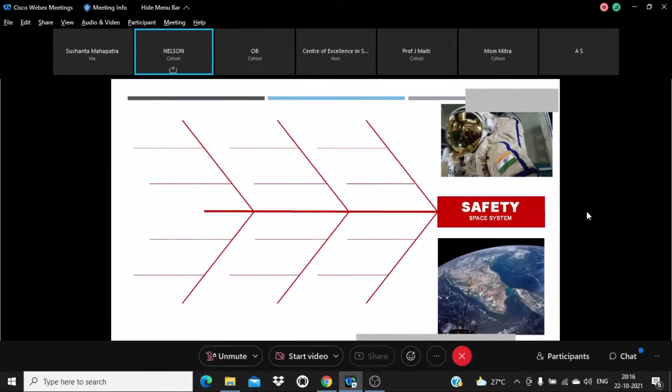So when we consider the safety of a space system, in space-faring nations or space-faring organizations, mainly six factors have been taken into consideration.

First one is human safety. Human safety consists of the ground crew safety and astronaut safety. And next comes public safety, the local public safety and general public safety. Local public means the facilities and public located near our facilities.

General public means wherever the launch actually occurs. When we consider space, when we consider industry, hazards are static. It either gets transferred from one point to other through pipelines, conveyor belts, or process equipment.

But here, the launch vehicle is fully loaded with a lot of propellants and propulsion systems. It is passing through many countries. So the safety of all those persons has to be accounted for when we design any launch vehicle and design the missions also.

Next comes asset safety - the facility, whatever has been built, has to be protected. It has to be protected from external fires and fire scenarios which can happen because of processing.

Then comes mission safety. When a launch is taking place, there are a few inbuilt systems which have been incorporated into that launch. We look for a lot of components assembled together, which will be integrated into that vehicle. These components can function, but they can have malfunctions also.

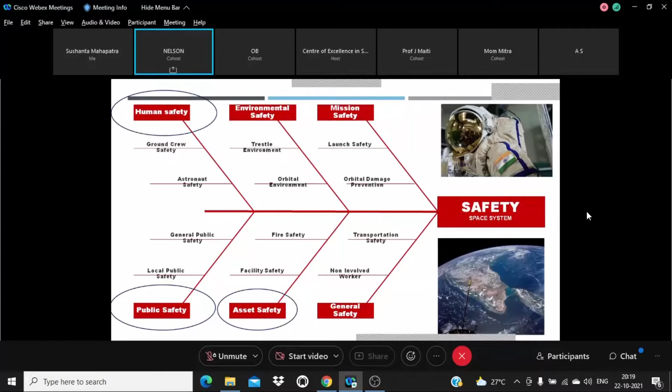So our systems are complex and very hazardous too. When we compare some products, what industry makes - if industry makes steel as a final output product, this product as such is safe.

Only the material handling part comes into it. But when you compare a chemical which has been manufactured, this has to be properly handled. The chemical has got inherent potential dangers. So it poses hazards either during manufacturing, after manufacture at the time of storage, and even at the time of transportation also.

So prevention through design should start with the business concept. The business concept should be very clear. The persons who do that business should be very clear about the material they handle and the activity they do.

In the early stages of my career, I was in construction, then equipment operation and maintenance. So when we get inducted into an industry, normally it's already an established industry, the systems are in place - we just have to manage the systems.

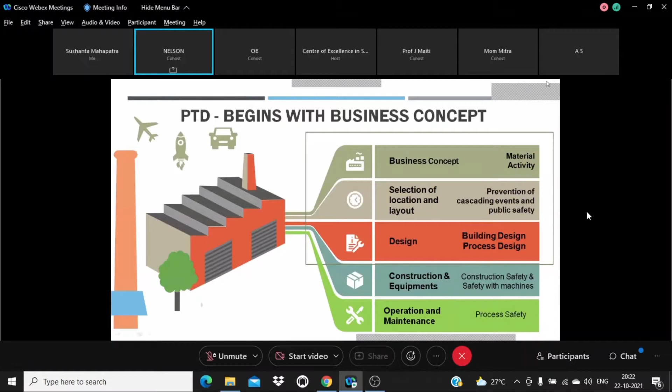So we should have a strategy for managing the unknown. If it is an established process or some data is available within industries or other places, it's easy to get similar best practices happening in other industries, and we can adopt it. But when we go for a totally new type of activity, like R&D activities, many of the activities will be done for the first time.

The best example I can quote here is a fuel oxidizer mixture used for propulsion - how it behaves at different types of stimuli is unknown. There are different types of stimuli: when you heat it, how it behaves; when you give an impact, how it behaves; when you give a shock, how it behaves; when you give an electrostatic charge, how it behaves. All these details are unknown.

Why? Because there may be some literature data, there may be some modifications, there may be some value additions - only then a new compound will be made. So if it is available still, there will be some deviations between the literature and the actual data. All these data are unknown at the initial stage.

So we should have a strategy plan. We should always have a highest safety threshold, applied risk reserve, to accommodate all those unknowns. So once the item is formed, we can evaluate all these parameters - how safe it is to process or how safe it is to handle.

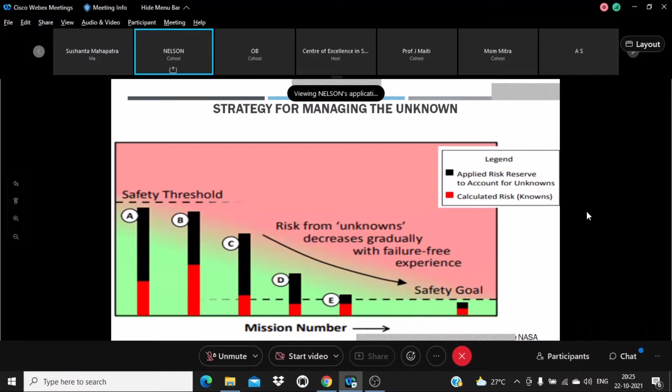So I will explain this with a case study. Last year, 2020, this incident happened at Beirut, Lebanon. The compound involved was ammonium nitrate. The first thing many of us would have thought is that it is an oxidizer - how could this have given such a devastating effect? Why? Because for the first time in my life I saw a blast wave captured on video cameras, even videos where persons traveling in a boat in that area - you can clearly see the blast wave coming and hitting the boat.

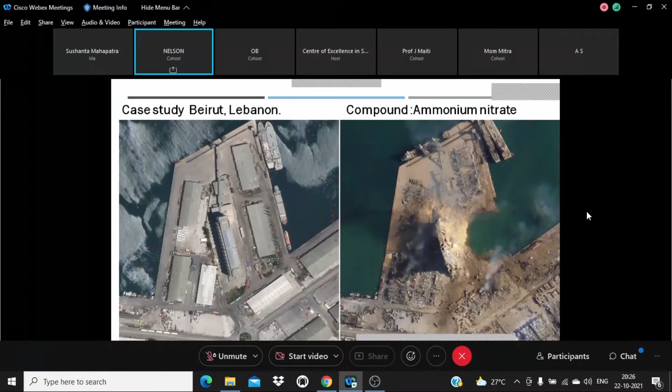From this picture, you can see the place where it was stored is totally devastated, gone from that area. Nearby, all buildings have been damaged, and the damage has caused very great loss for that particular area as well as the country. This is a closer view of it - we can see how the oxidizer, which was considered an oxidizer and fertilizer, caused such big damage to that area.

So first we have to understand what this compound is. We should definitely clearly understand what material we are processing. So ammonium nitrate, when considered for UN classification - there is a unique UN number allotted for all kinds of compounds which have been listed. So when you consider ammonium nitrate, there is a UN number, and it is classified as 1.1D. The 1.1 is nothing but, when you take the UN classification, it is classified as explosives - 1.1 is massive mass explosion hazard.

So utmost care has to be taken when we handle 1.1. This other compound, 1942, ammonium nitrate, is considered as an oxidizer. This 5.1 is nothing but oxidizing substances. 2067, that is also an oxidizer, categorized 5.1. You can see it's an ammonium nitrate based fertilizer.

But if some additives are there, like combustible materials, it can even give a devastating effect - the total property of it changes. And even in case of a fire, ammonium nitrate actually does not burn. However, it will support and increase the rate of combustion in the presence of flammable or combustible materials, even in the absence of oxygen.

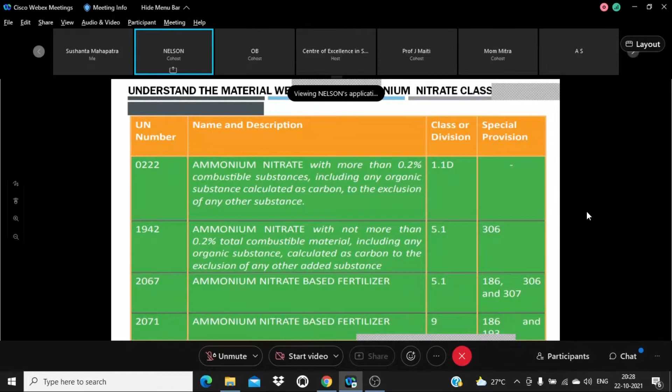That's why this is used as an oxidizer along with fuel components in many propulsion systems. Unless the total severity potential of this compound is known, this kind of incident can happen. Why? Because normally an oxidizer does not require any separation distance for storage. So it was stored in that area. And once a fire happened, all this came together and resulted in an explosion.

So I will take one more example, the LPG terminal incident which happened at Mexico City. Here also, we can see in that picture how beautifully it has been packed. The architect has played a very good role in packing the materials in a very small compact area.

But once one explosion happened, it resulted in a domino effect. The projectile flew to a distance of 300 meters, and there were a few modifications which were done.

Regarding the hazard identification, you can see no formal hazard identification process was carried out. There was lack of awareness of potential death toll if a release occurred. Why? Because you can see the nearby facilities and the populated area are very near to these facilities.

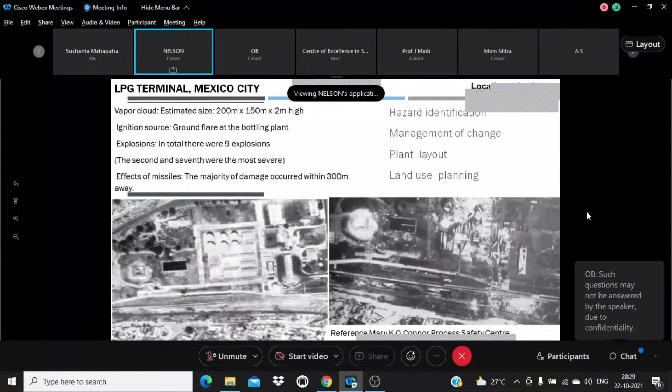This is actually a reference taken from Mary K. O'Connor Process Safety Center. There is a data analysis for 30 years with a number of incidents, and the outcome is that majority relates to mechanical integrity and land use planning. If land use planning is done properly, the consequence of many of these incidents could have been reduced - you could have reduced the fatalities to a very drastic number.

So when we consider prevention through design, it's not only the small devices we consider, it's not only the machines we consider - we should consider a holistic approach for our total business itself.

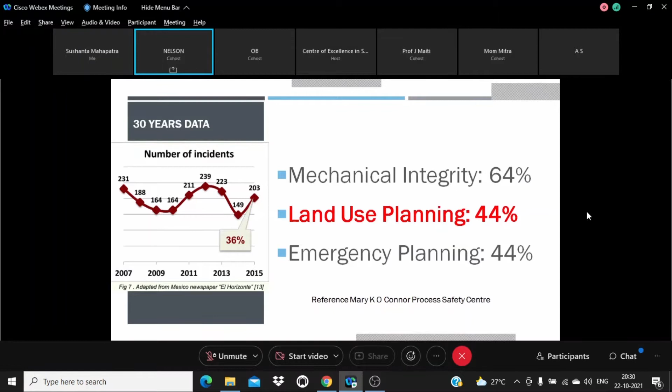Next, one more incident - this will help in getting more understanding about the importance of location. It's the Pepcon incident which happened in the US. Here the compound was ammonium perchlorate, used as an oxidizer in rocket fuels.

Here also a fire happened, and it gave a blast, but out of 77 employees, 75 escaped, running or driving away from the facility through the desert.

And the nearby facilities were not fully affected because there was a sufficient separation distance between the other nearby facilities. And the remaining employees were differently able - one was not able to escape, and one stayed back to alert emergency dispatchers of the situation.

And even the firefighters were approaching that area. The company had given the employees warning that there could be a devastating explosion. This is a major incident - when we consider the industry, all employees will be properly trained in case of an emergency scenario. So handling an emergency scenario inside a plant will be much easier compared to when we go for an offsite emergency.

So according to our business, we should select a proper location to get this advantage. And here also you can see ammonium perchlorate - 0402 ammonium perchlorate is classified as UN HD 1.1, and 1442 ammonium perchlorate is classified as UN HD 5.1.

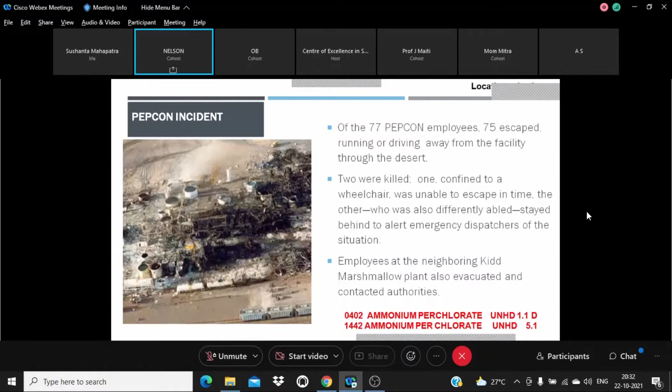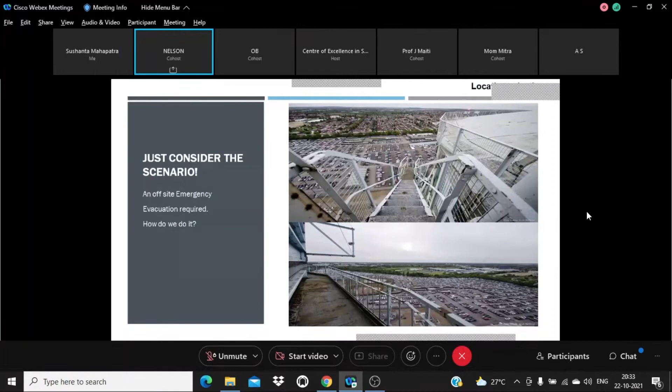So always when we go for designing our plant, we should consider the worst-case scenario and offsite emergency evacuation required. How do we do it? This always has to be kept in our mind.

I will give an example with the major space ports of the world. You can see all these major space ports are located most probably near a beach side. The Kennedy Space Center is almost near to a beach. Our Sriharikota, which is in Andhra Pradesh, is also near to a beach. This is wisely chosen to have a safe launch window for the launch vehicle to take off and get into space without affecting or causing much damage to the general public staying nearby.

This vehicle will be passing through other countries also, and there is a system installed called the destruct system. If the launch is not happening in the right trajectory, it will be destructed and made to fall into the sea itself. That is an extra abundant precaution for safety considered when we do these launch operations.

So how do we do it? That is practically how we can approach this kind of situation at the initial stage. That is what everyone is looking for. Mainly the industries look for what is the best practice. So the best practice here, this system we actually follow, is a safety review system for all the activities, starting from the activity concept.

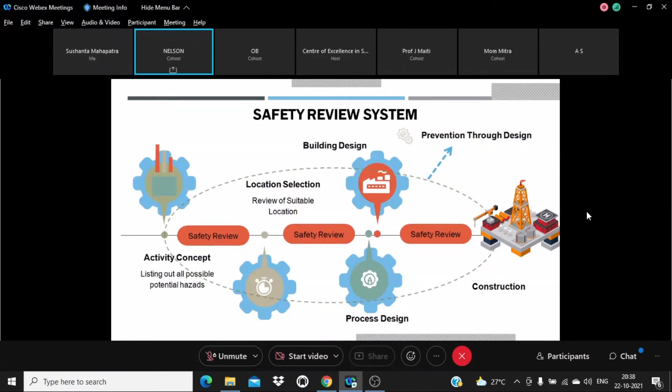Once the construction starts, practically it is difficult to do any incorporations into the drawings. Why? Because what we have to do is get the drawings, review the drawings at the initial stage, do the modifications at the initial stage, then give it for construction. So the main advantage of this is the ability to influence—that is the major benefit when we do this kind of review at the initial stage.

Once it is there in the drawing for execution, it's very difficult to change the structural part, and very difficult to incorporate the safety features required at the time of construction, since the process has already been defined. So the concept stage is the best stage for identifying the hazard, identifying the control measures, and incorporating it in the design drawings.

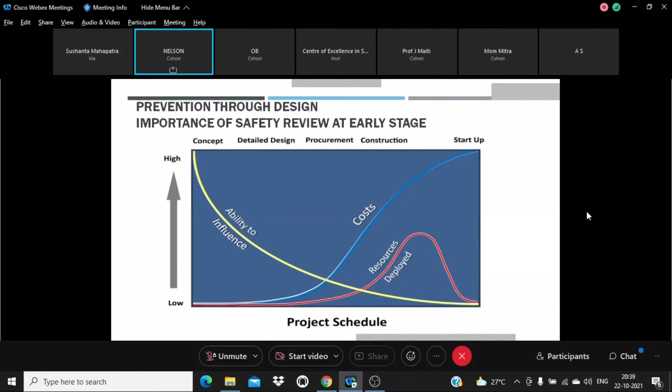So when the project schedule moves on, if this is not done at the initial stage, what happens? Many times the drawings don't come to the safety review teams, and definitely many points will be missed out. At the time of commissioning, the PSSR has to be done, and a lot of compromise has to be made in the PSSR. We know this is not going to happen, but still the facilities may have to be cleared. So always do it at the initial stage.

And when we come for the process, we should go for the process hazard analysis. Accordingly, the building design features have been incorporated.

Mainly four things we should consider for the process hazard analysis: environmental release and explosion scenarios. Explosion scenarios give the blast effects and the overpressure at a particular distance from nearby facilities, and whether we have the separation distance. Fire scenario considers nearby potential fire hazardous installations and the fire suppression system.

Many facilities, when we deal with oxidizers and fuels and some chemicals, if fire happens, there is no other way - we have to just run and escape. That's what we explained in a few case studies also. So in a fire scenario, the fire suppression systems should be in place within the building itself.

This has to be considered at the initial stage, then only the implementation will happen. After construction, once the plant starts running, taking a shutdown and putting in major firefighting systems or fire suppression systems inside will definitely result in loss of production. So safety should be in parallel with the production activities.

It should be like rails - they should not meet each other, should not be far apart. Both should go parallelly. And for the fire scenarios and toxic release scenarios, we should definitely consider the time weighted average, whether it's safe for persons to work, STEL values, IDLH values.

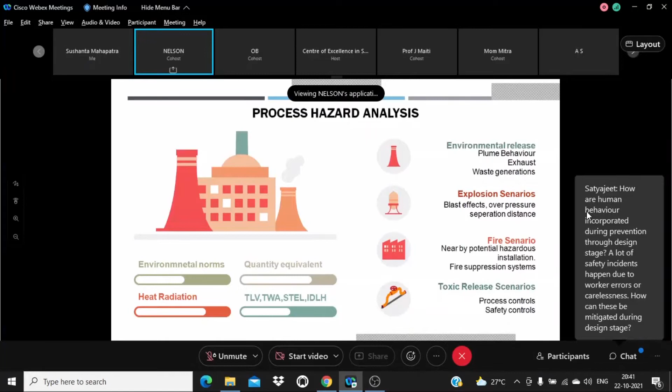We come for the layer of safety protection and process design. First, in process design, we should go for only the minimum quantity - whatever is required only has to be brought to that facility for process operations. If possible, go for remote operations.

First, we should arrive at the safety parameters. This happens when we design the process for the first time. Once the safety parameters are defined, the required adjustments can be done in the quantity - quantity can be enhanced if the safety parameters are within the limits.

Then the next layer of protection is separation distance. This is meticulously followed in our facilities, as I told you, because we don't want any domino effects to take place and bring the total buildings to a collapsing situation. Then comes process controls and safety controls like instrument controls, alarms, and interlocks.

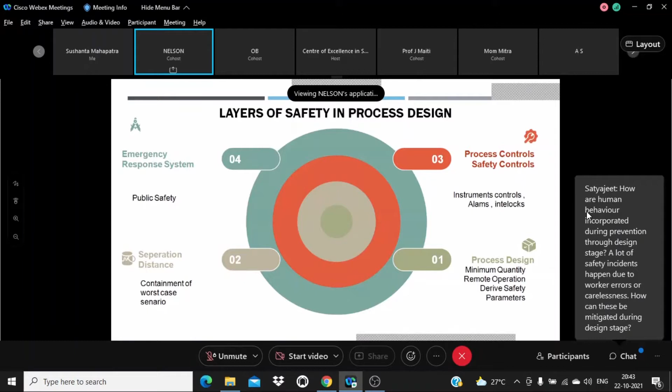And then comes the emergency response system - that is public safety. How the public is affected, how far they are, how the emergency scenarios have to be communicated to them, how they can be trained. All this accounts for the layers of safety in process design. This has to be considered at the initial stage.

Coming to the actual scenario, how practically this can be done: understand all the potential hazards, move them to the location where the impact can be kept under control. In the figure, you can see in oil rigs the flares are put slightly apart from the rig, so that even if the flare switches off for a few minutes or seconds, the toxic gases will not affect the persons working on the platform.

A lot of computer-based models are available to estimate this kind of environmental release scenario - heat dispersion models estimate vapor cloud dispersion and heat radiation. These models provide adequate consequence estimates for the site selection process.

Even experts who are specialized in computational fluid dynamics, AUTODYN, and similar tools can simulate this data. But in industry, this kind of expertise is generally not available.

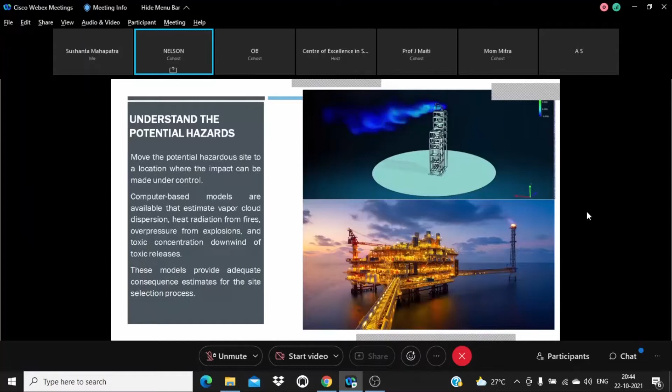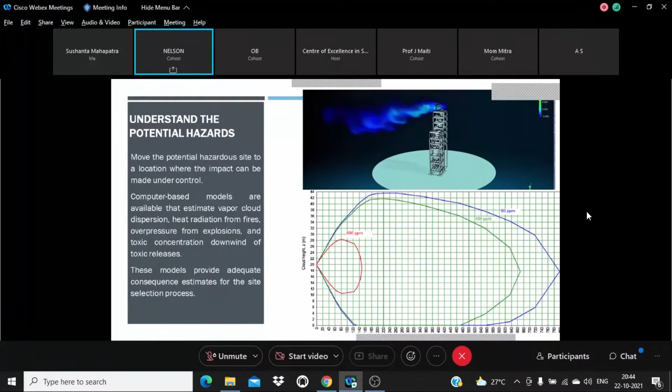There are few softwares which, once you give the input data, can be used to simulate this kind of results. There are few softwares available. PHAST is one of the software.

With this data, we should go for this location. The facility siting investor has to think about the facilities nearby, how the proposed facility is going to affect the nearby facilities, the resident area, future town expansion, and investment in real estate. Proper spacing and separation distance has to be put in place so that if one goes wrong, the total business is not going to an abrupt stop.

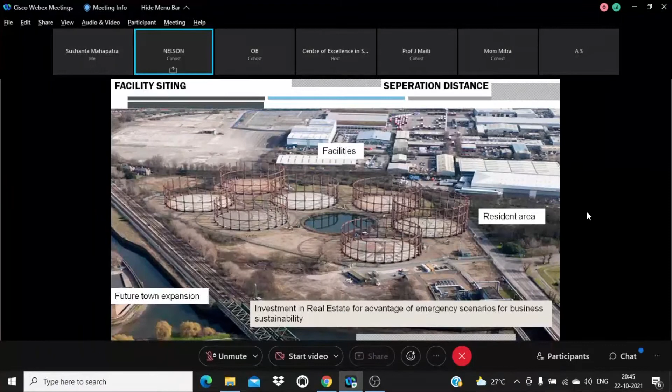Even if these details are not available, there are few prescriptive methods for taking these considerations. Like in India, we can take the Explosive Rules 2008. It gives the safety distance for manufacturing factory of magazine of category UNHD 1.1, 1.3, and fireworks.

It gives the distance criteria between distance requirements with respect to the quantity, with respect to the process buildings, with respect to the outside facilities, offices. It also gives the wall thickness required to prevent these explosion effects from contain there itself.

OISD also gives the distance criteria between the facilities like block. Table 1 gives the distance criteria between the blocks and facilities, equipment within the process units, then tank and offsite facilities, then LPG facilities, LPG storage vessel and boundary wall. This is with respect to Indian scenarios.

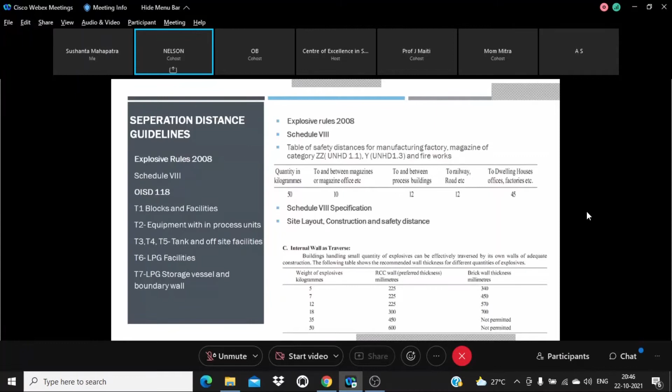When you consider Explosive Rules, or this check also, it is the process inside quantity distance and outside quantity distance. Process inside quantity distance gives the details of distance criteria required within the process buildings of similar facilities. Outside quantity distance gives the distance criteria for the general public and general roads, like general office buildings.

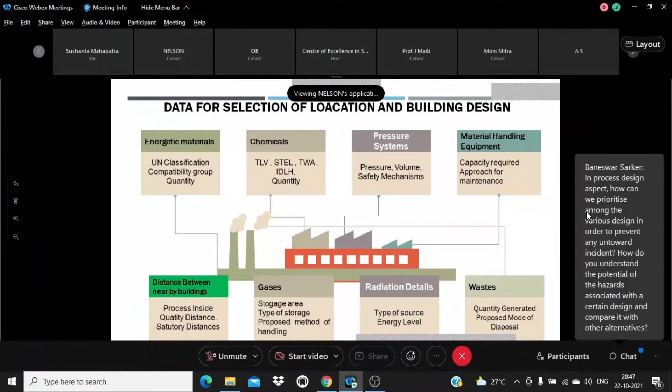We require a lot of data to get this put in place. Lot of data has to be collected at the time of initial concept phase. What is the item we are going to process? What is the UN classification, the compatibility group, the quantity we are going to process. If it is chemicals, the STEL values, TWA, IDLH, the quantity of the chemical we use, how much we use. If we have got any suitably replaceable material or chemicals, that can be selected at that time.

When you go for the pressure systems, the pressure volume, it gives account for the TNT equivalent of pressure volume, how much TNT equivalent is there when you're going for the pressure testing areas. If that goes wrong, if during the pressure test the article breaks, what is going to be the physical explosion effects onto the nearby rooms or nearby walls?

What is the safety mechanisms? How has this safety mechanism been routed out? How many mechanisms are required with respect to the potential when it comes to material handling? Why? Because at the time of location and the building, these details are required for the designers to design.

What is the total capacity required? Approach for the maintenance, and then distance between the nearby buildings, the gas, what is the storage, where is the storage area, type of storage, proposed method of handling. If it is any radiation buildings, type of source and energy level, and then waste generated, quantity generated, proposed method of disposal.

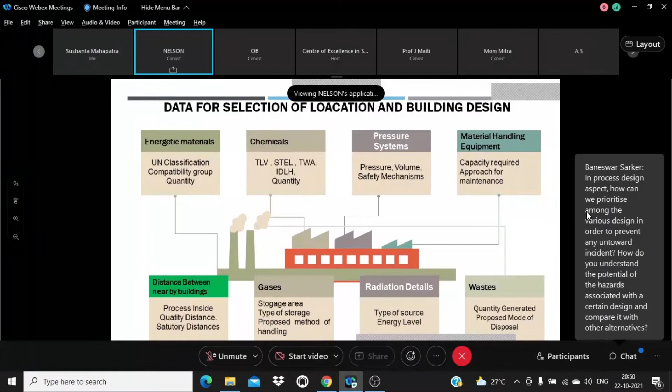So I will try to give a basic root cause of why there is a deviation between the designer and why safety has got a lot of recommendations at the time of design drawings. This is the designer's perspective, which I took from my own experience dealing with projects. The designer's perception as well as the actual hazard perception is totally different.

When the designer takes up the hazards, he already has proper stairs up to the access areas. Consider a facility which has only a single floor, and AC units like cooling towers have been put above the first floor. So the AC team has to access that area frequently. Of course, the process team is not going to operate the AC systems, so frequent access is required for the AC team into that area. So they simply provide a monkey ladder at that point.

When we design this facility, these facilities are designed for the next 20 to 25 years. So over all these 25 years, consider the number of times the AC team has to climb up this monkey ladder, and sometimes they have to climb up with material for maintenance activity. So the frequency keeps increasing at that point.

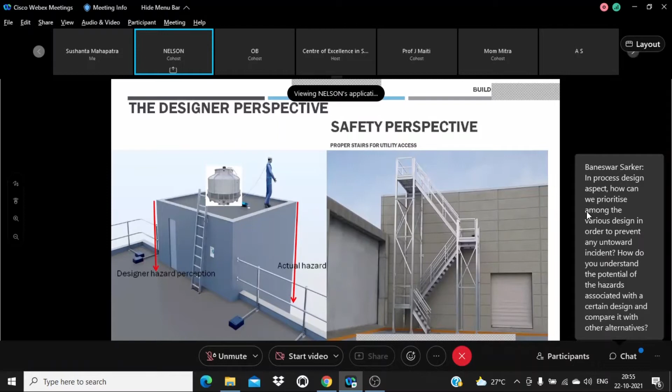So, in designing, the actual hazard that should be properly communicated to the designer by the safety team or the project teams should happen initially itself, so that they can address these things at the time of design itself.

So when we go for a building design, in India, the National Building Code 2016 has beautifully listed out all the requirements for proper access—how the access should be, the height, and emergency exit grids. Everything has to be properly detailed.

Even the stairs and handrails, the stair width, stair height, the thread height, the riser and the stair width, everything has been detailed in the National Building Code. So sometimes what happens in the background is that there may already be a standard design, a standard drawing for stairs, and that gets copied in upcoming designs. If we can give a correction at the initial stage itself, the further drawings will also be corrected with respect to a proper standard. So the standard has to be properly communicated, and the designer should be properly trained in the standards.

If you go according to the process, if you are using flammable material or flammable liquids in a particular bay or lab, the electrical fittings and the electrical selection has to be done very appropriately. It depends upon zone 0, zone 1, zone 2 classifications. The light selection, the power sockets, everything has to be selected with respect to the item we process - that is, its flammability. If it is a flammable material or if flammable storage is there, definitely we should account for it, along with lighting protection systems and electrical isolation devices.

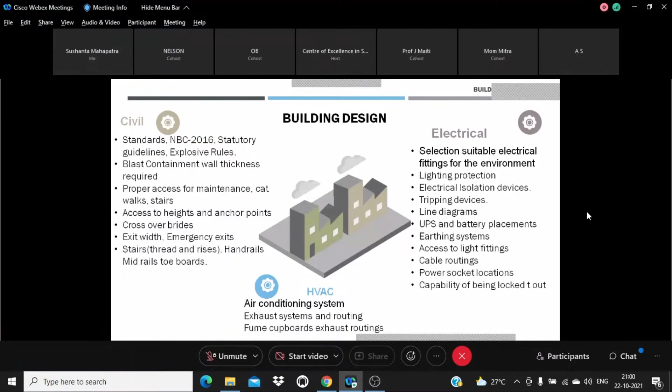The fume cupboard exhaust should not be routed to a nearby building or window. Why? Because this toxic chemical gets absorbed and pushed to some other area where persons are working. We should definitely consider if overhead tanks, overhead water tanks, or overhead utility services are there. This toxic air routing should not go to that area, even for small labs or fume cupboards.

Major gas routing goes to flares, not flares from gas holders, but from gas generating units after blowing operations - everything will have a flare. But for small things like a chemical analysis lab, there will be a fume cupboard or exhaust system. This routing has to be very proper, routed to a place where no persons are there, so these effects don't cause any ill health for workers in that area.

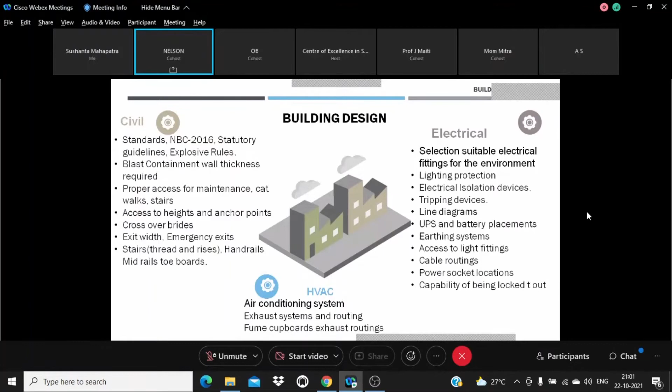For anchor points and handles, it's better to provide handles at both locations with free passage. Even in some steel industries, proper access has been provided for the light - a catwalk is provided, a full structure, for the safety of electrical maintenance persons. Some buildings don't have it, but when we procure a crane, the crane itself can have a safe area for a person to stand and work.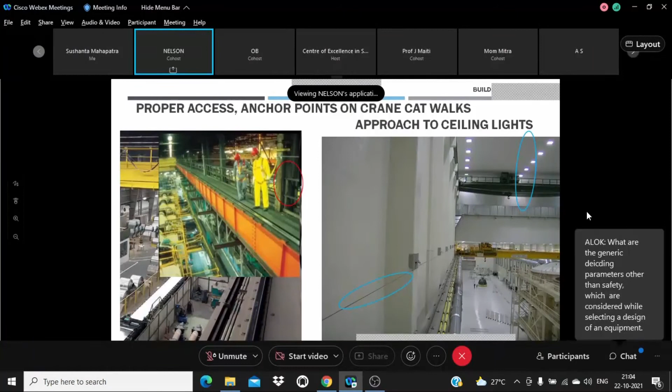When high potential is there and frequent access is required, definitely provide anchor points so the belt can be anchored easily - anchoring a belt to an anchor point is easy for them and they will do it. But without that, tying a lifeline properly and ensuring its usage cannot be guaranteed.

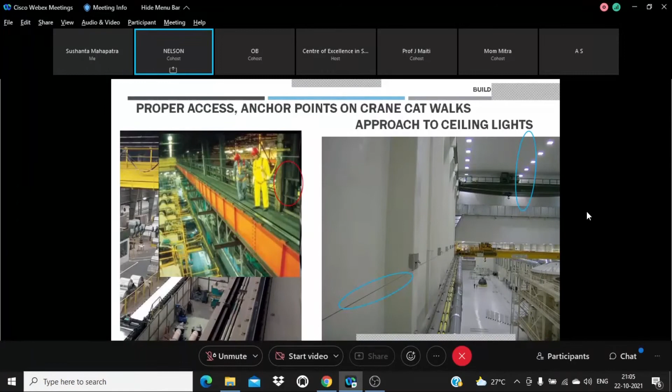Coming to fire protection systems in building design - fire detection systems, fire protection systems, fire alarm systems, everything has to be considered. It is fully detailed in the National Building Code with respect to area, height of the building, hazard classification, and building classification.

One point I'd like to highlight is the relative position of smoke detectors with respect to AC ducts. If a smoke detector is placed just near an AC duct, the duct will always be blowing air, so smoke will not come towards the smoke detector - it will be moved away. This is because if an AC duct is there, there will be a return path also, and most probably the smoke will go to the return path.

Even though there are duct detectors, the relative position of smoke detectors has to be considered. Fire suppression systems like sprinklers and others also have to be considered.

For propellant handling facilities and explosive facilities, it is not mandatory to provide a fire suppression sprinkler system, but it's better we provide it. Why? Because doing firefighting on a propellant is impossible, since it's already mixed with an oxidizer and fuel. So even if you put water on it, it will still burn.

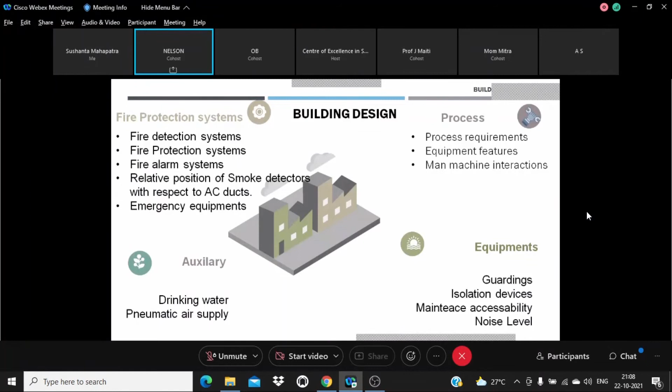Only pneumatic drills and similar tools are available. If proper line routing is done at the initial stage itself, we can have a QC-DC connector throughout the facility, so we can carry out these operations anywhere required. All these details can be incorporated when it is defined at the initial stage itself.

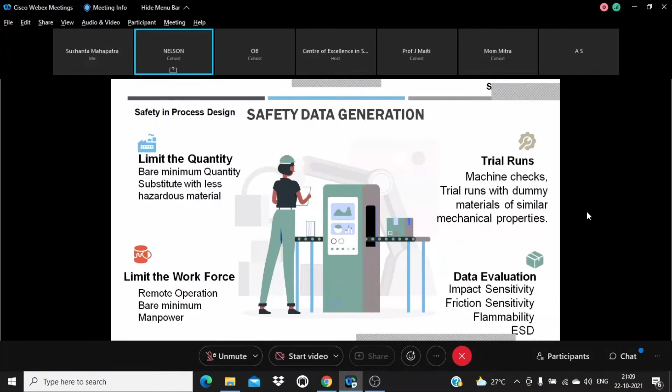When we come to process safety, first we have to generate the safety data. For this data generation, the bare minimum quantity will be used. We will limit the workforce and go for remote operations and trial runs.

As I told you, when we do trial runs for the first time with some compounds or chemicals, the machine has to be pushed to its limits. What all outcomes can occur, what can happen with the machine going out of control - everything has to be listed out.

Sometimes we may do trial runs with dummy materials of similar mechanical properties to know how the machine behaves when we push it to its limits.

Once the data evaluation is done, once we get the impact sensitivity, friction, flammability, ESD and all these details, we can decide how the process should go - whether persons can be allowed nearby for processing, or if required, can go near. Otherwise we always try for a remote operation. We expect that it may give a blast or a devastating effect, but a person should not get injured.

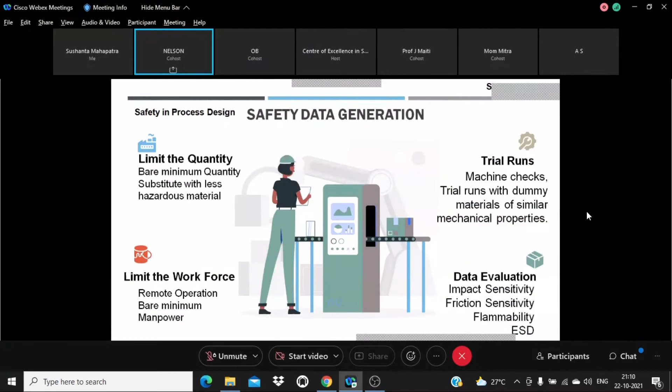Coming to process safety, this is applicable for batch operations or initial operations. When it is an established operation, we should have the basics in place.

When we go for process operations, definitely in a chemical process you'll consider a reactor, a tank, and a basic process control system. The basic process control system takes feedback from one input parameter and gives the commands for closing or operating the valves.

An additional factor we have to consider is what happens if the SCADA hangs. There are a lot of automation systems coming into place, and a lot of PLCs also coming into use.

If the SCADA, most probably the process operations will be done with the SCADA. If the SCADA hangs, how is our system going to behave? If our PC hangs, how is our system going to behave? If software bugs are there, if PLC bugs are there, how is the system going to behave? So what we have to do is practically overload this SCADA, overload our PC, push the PC to its limits, and see whether we are able to operate this system as per our required process conditions.

We should consider whether the process event can cause a tier 1 incident with a greater consequence, or a tier 2 event with a lesser consequence. If it is a catastrophic event, definitely we should not go for a probabilistic analysis there. Why? Because once in a blue moon only it will be happening, but that should not end our business. Always we should consider catastrophic or significant events with utmost caution. At the initial stage itself, studies like HAZOP, FMECA, and what-if will reveal some additional requirements at the process design stage.

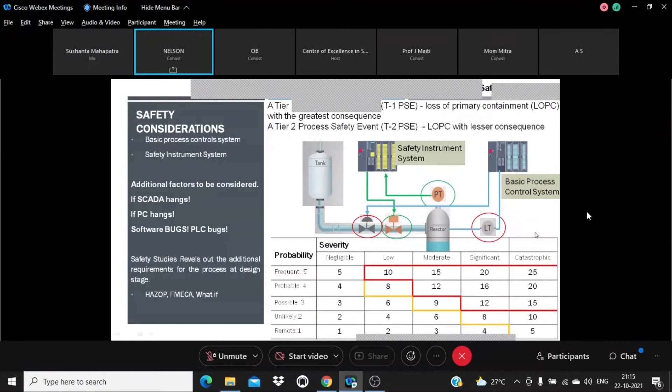I hope that I gave an idea of how this has to be designed and considered at the initial stage.

The way forward is that we should always have a defined process. We should estimate the potential hazard at the initial stage, design with safety. There will be MOC, management of change will be there. Then only we can sustain in the market. According to market conditions, according to the new emerging scenario, we should change the process also. We can adapt the process, but definitely we should review the management of change very rigorously, starting from the business concept, starting from the location where we are going to do it. The building has to be capable, the facility has to be capable of doing it. The facility readiness has to be ensured. Then review and continual improvement. So with this we can go for a sustainable model, starting from the initial stage of design.

So once the manufacturing is in place, then the normal procedures, normal industrial best practices will be coming into picture.